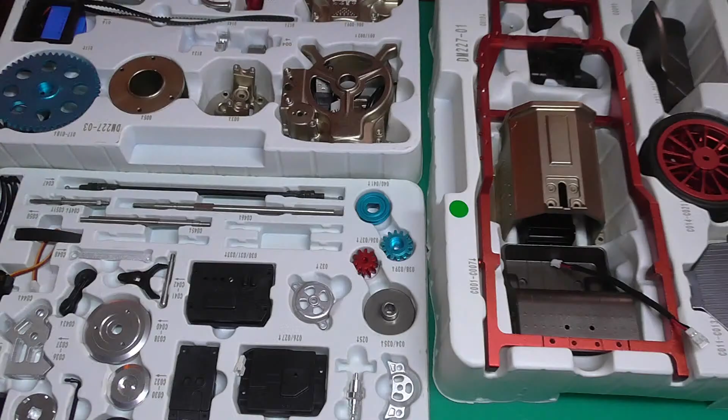Tonight I'm going to be building this bad boy. Hopefully this works, as you can see there's loads of it. It's sort of like a Ford Model T car, but this car is all metal with a working engine, so much so that I've already taken out the first bit because I can't do a live stream and come back straight into it without anything prepared. That's asking for trouble. But then again, it is Car Crash Tuesday, a Car Crash Tuesday stream. The first thing we're doing, it's obviously a single piston engine, so we're going to be making the piston.

Sticking it in the oil. I don't think I'm going to need any of this stuff because this is all about building the main body of the car and stuff like that, so I'll probably keep that on the floor for now.

Now this is from the same company, Stirlingkit, the same company that bought us the robot up there, the nodding donkey, the radial engine, which is somewhere. Where's my radial engine? Oh, that's behind the motorbike there. And we're going to be doing this car now.

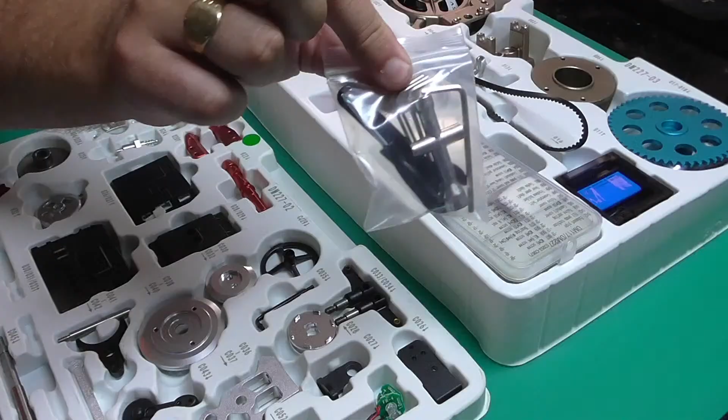What I'm going to do, which is going to be slightly different tonight, is I'm actually going to use all the tools that come with it. As you can see, they are in this bag here - we've got the Allen keys, sockets, everything. I'm not going to use my stuff tonight. Everything you see is metal.

Where we have all the springs and stuff normally, this time we've got two lots of this. But the good thing is it all goes up in a number - these go from 42 to 67, from 68 to 111, so everything in those we'll be able to find there. Everything else has got a number on here. I did think I had some missing parts here, here and here, but there's no numbers corresponding to these bits, so I think that's just the way that's been vacuum sealed.

But some of these parts, they are lodged in really well. Even the steering wheel is all metal - pretty fun thing this is going to be. But I don't know when I'm going to need this, so I will put that to one side without breaking it.

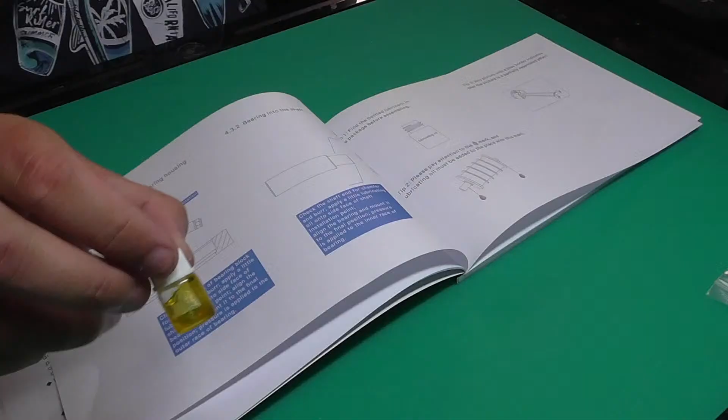And bring over the instructions, which hopefully you can see - the white balance has got a bit weird. But there you go, this is just telling us about how to put in bearings, how to put on clips. You still need this little pot of oil and lubricating oil. I don't know if I'm going to use this or use my own oil for this, but we are going to need that, where to lubricate things, that sort of thing.

And the first thing we're going to be doing is we're going to be creating this piston, as I said. Now we have got to use these blinking clip things, and I'm not very good with them, I have to say. So stand by, let me get these things out.

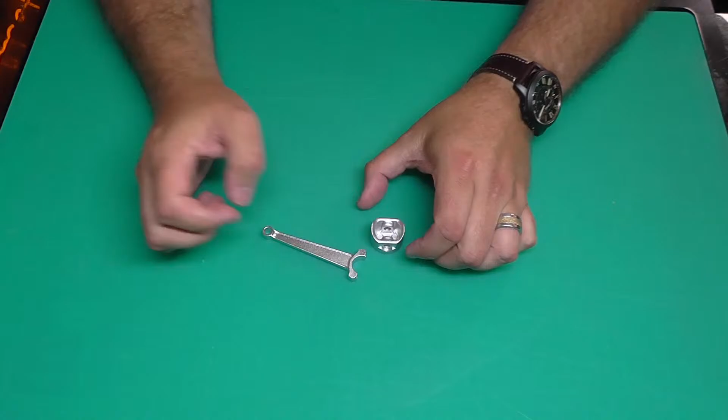So we need the piston arm first, and we also need the top of the piston. We need a little shaft, and then these are the things that I'm on about, which I absolutely hate, because I've got to try and get these in. And I know there's no easy way to do this.

So first thing we're going to do, take the small end, and I'm going to be putting that in here. As a matter of fact, I'm not going to do that - I'm going to zoom up that camera just a bit so you can see what I'm doing. And then we're going to be putting this shaft down through everything.

Now I've got to put these little clip things in, and I really wish there was an easy way to do this. But there's not. I guess getting one in is going to be okay, but getting the other, yeah - let's try it with pliers.

Now if I can hold it like that, I should be able to push that on. Should be able to - nope. I knew this was going to be a nightmare. Why do I do this on a car crash stream?

I'll get one on and then I'll look at chat, I promise. There has got to be an easy... oh, hang on, got to be an easy way. So theoretically, if I hold that like that... there you go, that's one on.

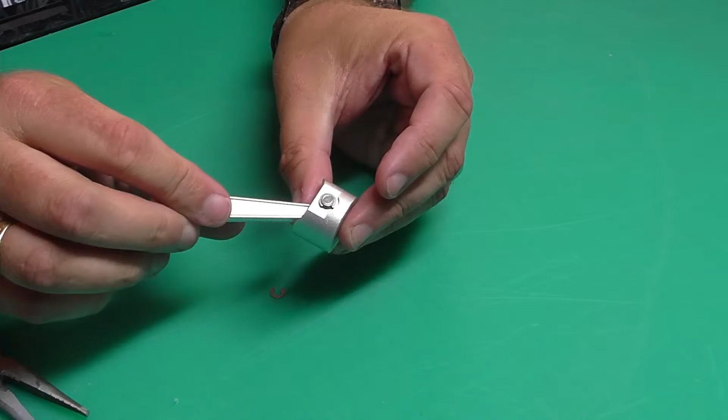Very good, C-clips, I don't know what they're called. What's Lou say? The rounded dome under the sheet looks like it could be Wayne. They're building an artwork of me.

They should, I'd build it. I don't know if Mrs. Welder Wayne would build it. One of me's enough, I think.

There we go, look, that one went in a lot easier. So we now have got a piston which works.

Next thing we're going to do is we need some more parts, which again I haven't got out. What an idiot. Okay, hang on a second, I need part 10.

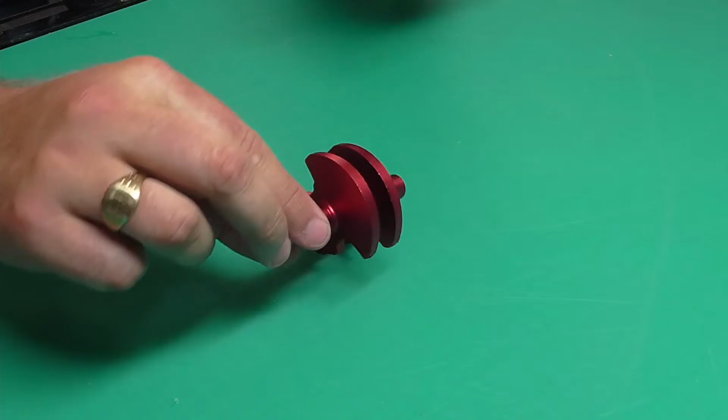Which is this lovely thing here. Look at that, all metal. I love that colour, I like the metallic colours. I used to have a car which was this sort of metallic shine, but in blue. I do like that, I love that colour.

So that we need a clip which looks like that, it's a little clip, and that's it. We just need 2 screws, which the good thing is I've already got them out. What I haven't got out is the Allen key, which is going to drive these in.

So this comes with Allen keys. We've got 1, 2, 3, 4 Allen keys, a socket, a tiny screwdriver, and a spanner.

I'm guessing it's the biggest one first. It is. I'm the model husband. Oh my god, Lou, you are so quick.

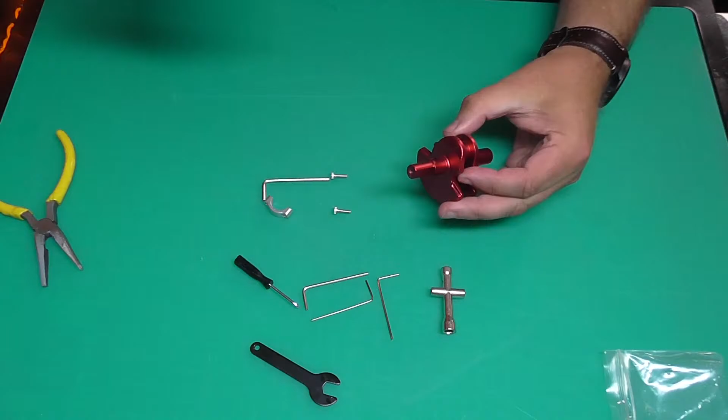Okay, where's this going? You've thrown me again. Okay, so this side is going to be going onto that center shaft, but we need to attach it to the other side here to lock that into position like that, if you can see that there.

So I'm going to be putting this in with the Allen key and this. Now remember, these are never magnetized. So theoretically, if I can get one in just a little bit of the way, like that, I should be able to get the other one in exactly the same way. Wow, that works better than I thought it would.

I think the last time I built something on stream was probably that 24-hour live stream, wasn't it?

Why are they called E-type clips, Wayne? They did look a little bit like an E, if that makes any sense.

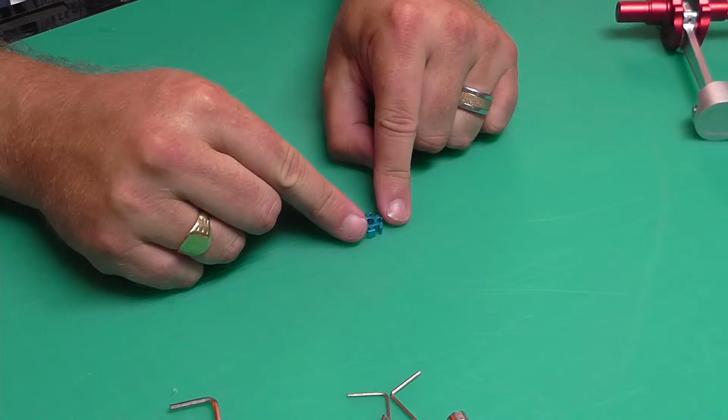Okay, so we have now got a piston on a cam here, looking just like that. We are now making an oil turbine, and I've already got the pieces out for that, which is this tiny blue piece here. So tiny, I'm going to zoom up even a little bit more.

Again, this is the colour of my old car. Look at that, I love it. As a matter of fact, that's not a million miles away from my Peugeot 205 I had as well.

And then we've got this little shaft here, and that is just going to go in like this. It has got a little flat side, so that can only go in one way. So that is the oil pump turbine.

And I'm going to be putting this in the oil pump box. Now that is big, that is... I think it's this, just checking the instructions. Is it this? I'm hoping it's this.

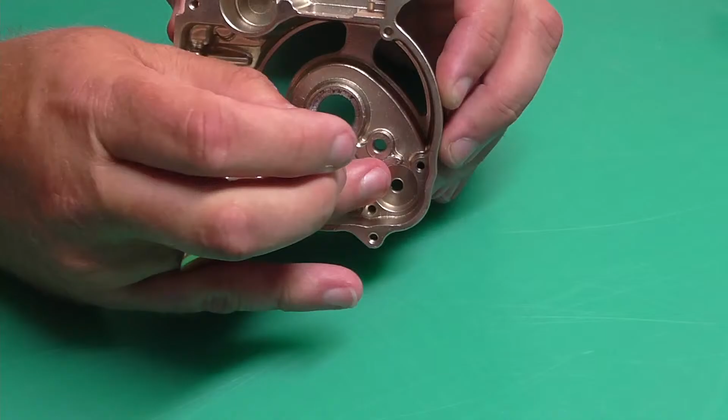That's this ginormous bit of metal here, and I need to get this round the way that they've got it there. And this turbine is going to be going into the hole that we can see just there, so that's in like that.

Now comes the difficult part of turning the page to see what I got to do next. Stand by, okay, I need some parts.

I'm going to install the oil pump end cover to this, so I need 65 and 52. This is where the game starts. I've got a 65 and 52. This is why I've got my little grabbing device here.

65 is going to be down here, and it looks like some little tiny screws. Oh my god, look, that just exploded like an alien intestine. Wow, stay. What the hell is that?

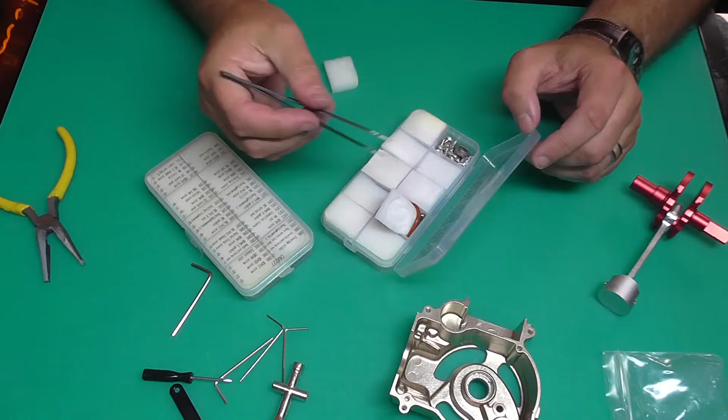Can you see that? Oh my god, look. What is this? Oh wow, there's two. That was like opening an advent calendar early. We can't be doing that.

Stay. Okay, so I'm guessing it's these two screws here, 1 and 2. And then we also need the plate, which is 52, which is in the one next to all the snakes. And the plate looks like that, I'm guessing. Yep, that looks happy. We're happy.

Oh, that thing's just going to be bane of my life now. Look, I can't get rid of it.

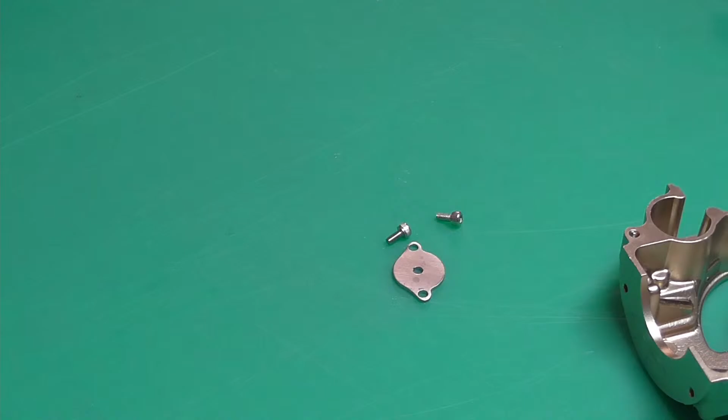So we want to hold this turbine in place, which means we're going to be putting this over the top, just like that. And again, securing it down with these screws.

There you go. Hello, Ian. How's it going? I'm just looking at chat. It's a hernia. What's a hernia? You have the most random chats in chat there. I've got the chat for YouTube right next to me, so I can see that. I can't see chat from Twitch and stuff at the moment, but there you go.

Anyone else seen the Enterprise D Advent Calendar? I did. Nexus posted it today. I don't know if that's something I might be buying. Hello, Todd. How's it going?

So there we go. That's the turbine and it's kept in by that little plate there. We're going to be putting a gear shaft in there into the shaft hole.

So many innuendos on tonight's stream.

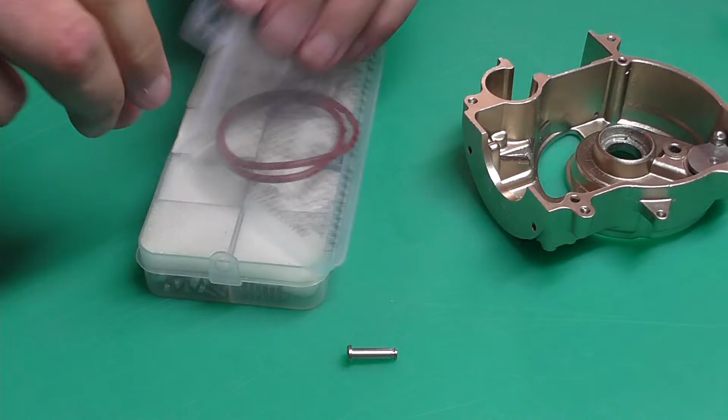Okay, the gear shaft is number 50, which is here. It's in with the all of this stuff. I'm guessing that is a gear shaft. You know what? I'm just going to keep those elastic bands out. They're not even elastic, I don't even know what these are. Okay, I'll keep them out. That is going into the gear shaft hole, which is right next to it, just there. Simples, that was an easy stage.

We've got to install gears and oil pump gears. That's the next. Oh God, what did I do? Okay, we're good. That doesn't really make sense to me. I'm just having a look.

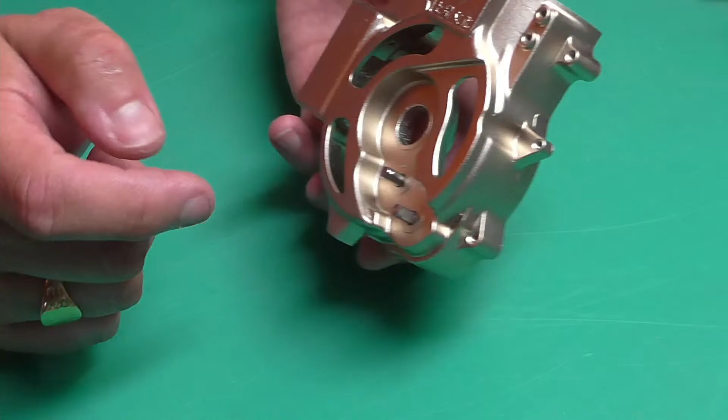Okay, so we're going to be putting some cogs on the end of these, and by the look of it, we're putting those damn split pins on again. So I need 37 and 38. That's going to be in the box. Ugh, let's have a look.

Bringing it up. 37 and 38. Well, there's 38. And there's 37. So one. Ah, wait a minute, there's two different sizes. I'm guessing it's that blue one there, not the big one. Okay, I hope that's right. I can't be sure. I'm going with it though.

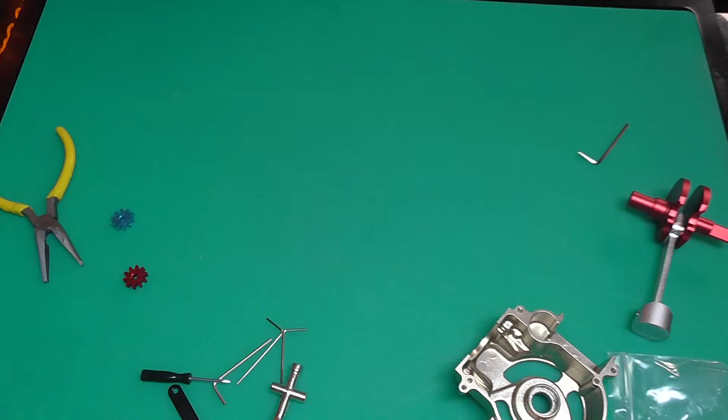And I also need some more of these clip pins, which are number 59, which again are in here, which are impossible to pick up. 1 and 2. And in answer to David's question, I can't get it out.

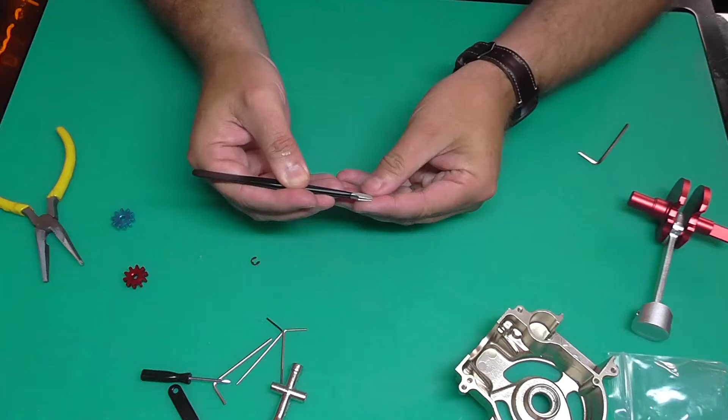Move that over there. Look, they do look like a C, but because they've got a notch in the middle of them, it could be an E. You see? I don't know. I don't know why they call it what it does.

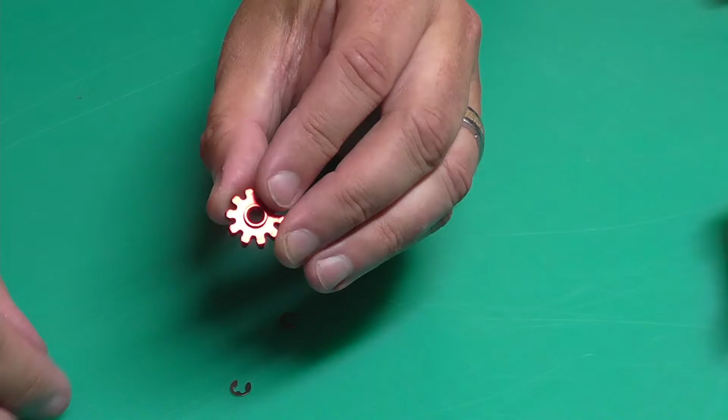Okay, so which one goes where? I've got an... I mean, these look exactly the same, but just slightly different colour. This one's got a sort of like circle which has got a flat side, and this one's just a complete circle. So I guess that's going to dictate which ones they go on. So the one with the flat side is going on this one here, which is the oil turbine. So that goes in like that. And the other one has got a lip on it, and I'm guessing the lip is facing down. That's going to go on there like that.

Got to put these split pins in. Not looking forward to this. You see how I pick them up then? I just press them really hard till they stick to my hands. There you go, that's gone in a little bit better. And then get me pliers. Theoretically, there you go, clip it in.

Okay, oh god damn it. Lining them up's the easy bit, getting them in. There you go, that's two. And now they're not falling out and they are free to turn. They turn better that way, I find, than the other way. But we have got them in place. It does want me to lube them up. So I am going to use my oil that I've got here, because I can really swamp it on there.

They are happy for me to use as much oil as I want, and as you can see, that's already made a difference there. So we're all lubed up and covered in oil.

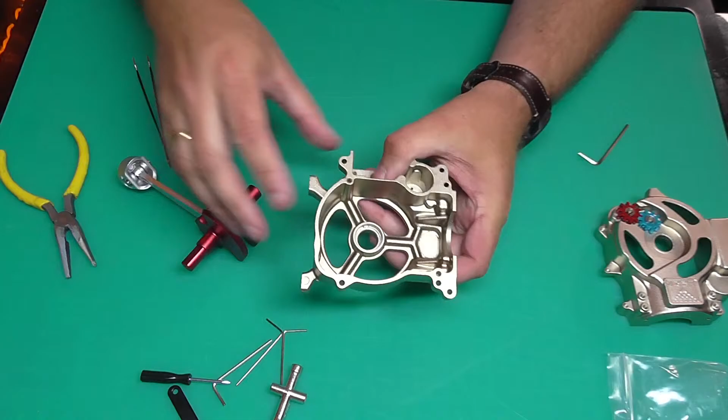Next I'm going to take the piston we've just been working on. I'm trying to figure out which way round this goes. Oh, no, it doesn't go in this one. Let me go get the next part out. Stand by, which is the other side of this. This is 001. I'm going to piece all of this together.

So they've got it this way round. I need another part, number 70, which is a water battery iron sheet, I think that's what it's called. No idea, I'm looking. That's not that. That's not that. I'm confused, stand by. Just looking at what I've got here. A water battery iron sheet, 070.

One, two, three, four, one, two, three. I haven't got that in here. I don't think it's this. No, it's not that. Just looking around now to see if I can find what it could be. This doesn't make any sense at all. 070, that's definitely 70. It's got to fit over the end of this here. So I'm looking for some sort of washer which has got a massive hole in it. Just going to have a look through everything.

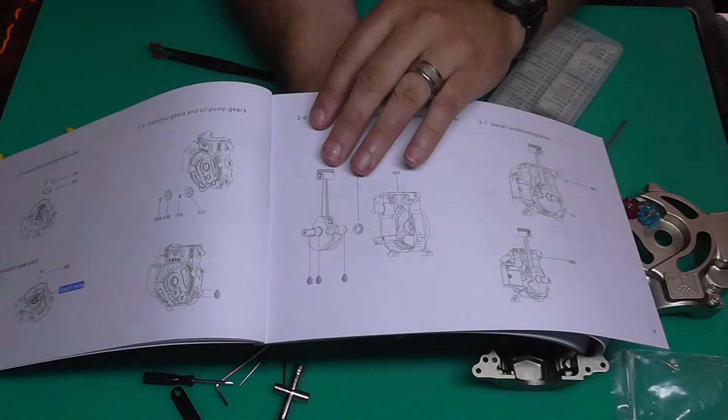One second. I don't think it's in there. Let me just show you what we're doing. We're looking for this little piece here, and it's definitely not in where it's meant to be. I'm looking again. It's going to be fitting on the fatter side as well, because that is going into here, like that.

And the only thing that's even resembles, even looks like that - I don't think that, is it that? I don't think so, it's not hollow, is it? No, it's not that, doesn't even look like the part. Okay, stand by, let's just have a look in this one. Nothing, nothing. Oh.

Oh, that could be it. Let me have a look at that. That could be it. Does it fit over this section here? It does, I'm thinking it might be that. Which in that case, that one was in stage - I don't know, it was in this box here. I think that's what it is. Let me look at the instructions.

No, it can't be that, because the end that we're putting through is this end here. That's the end that they want me to put whatever this is on top of. Stand by, still looking, let's drop that in again. It's not that, not that. Nothing in there, nothing in there, nothing in there, nothing in there.

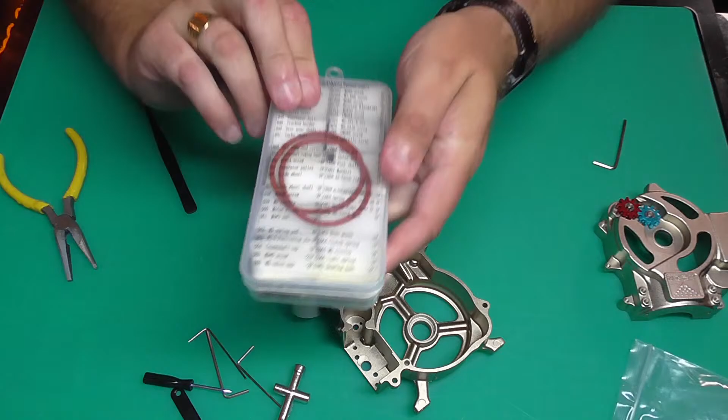Stand by, okay so we've got two 70s, that's the problem. So this one is basically - let me try and find it - has got just 070, that's the one that I want there. Let me show you on that, 070. On this one we've also got an 070, but it's got a C in front of it. So that's the difference, a little bit confusing.

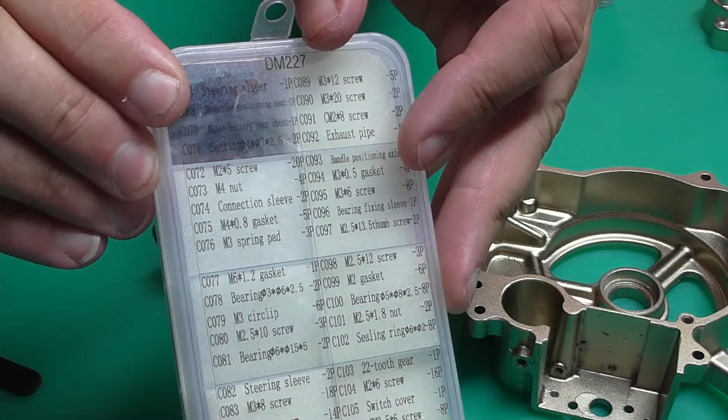So we got there in the end, it's a bearing, so we've got the bearing. That's going to go in like this, into this shaft, all the way in. So we've got our single piston engine being built now.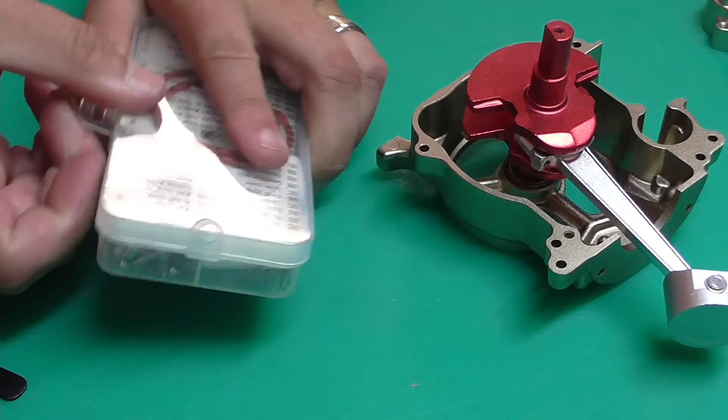We want to lubricate those parts up, I'll do that in a minute. But I do need some shafts, which are 63 - I say shafts, I think they're screws. Yeah, we got there in the end. So this is 63 we want, which is called a 2.5 inch positioning pin.

2.5 inch positioning pin, what do they look like? Ah, wait a minute, got it here. One. And should be another one. Stand by, is there two or just one? No, there's two. I'm looking for you, I'm finding you. Ah, hang on, I got it. There it is, there's the second one.

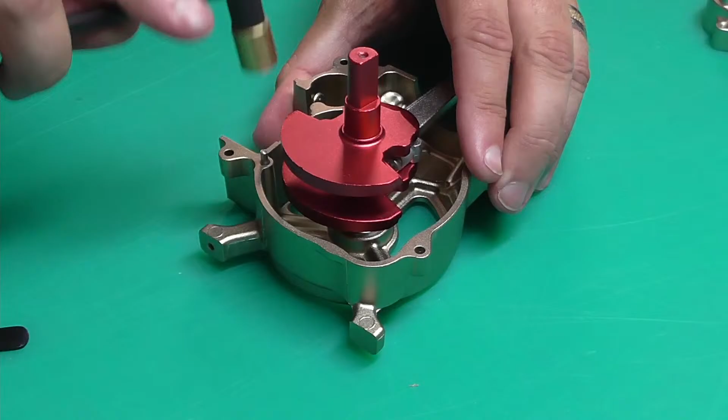Okay, the positioning pins are going in these holes here. So one here, like that. And the other one is going on the inside section - whoops, which I'm dropping, just here. I'm sure it can go down a little bit more, needs a bit of concussive force. That one's gone all the way down, that one hasn't. If I have to get nasty on that one, I will.

So that's those two in. Stand by, just checking. Okay, we need another 070, another - I'm trying to find it now - another bearing, which is going on the other side here, like that.

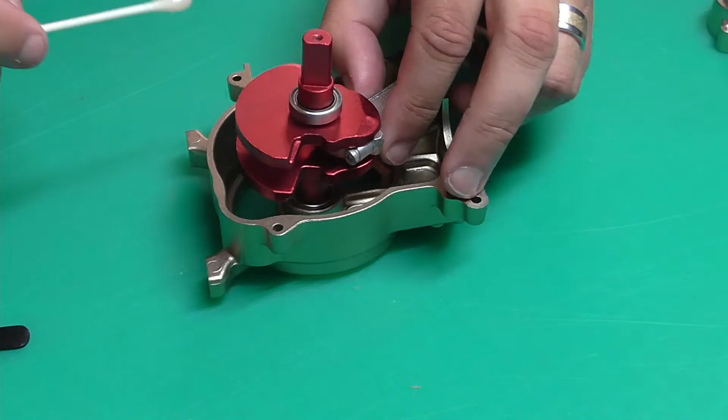I am just going to lube this up, and lube this one up as well. That'll drip in there - oh God, getting in a mess now. And we're going to piece these together. So theoretically, guessing it goes around that way.

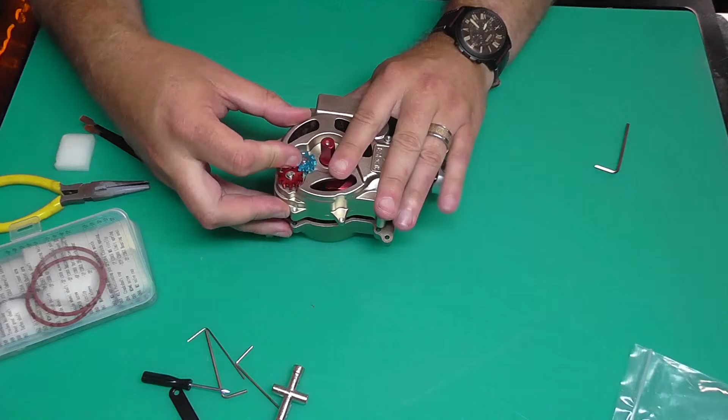That is going to go in just like that. Perfect. Looking good, isn't it?

Okay, we're going to be putting some screws in. They're going to go in this side here, and we need 4 of them. They're 54s. They're going to be in here. We need 4 of them. Move these stupid things out of the way.

Number 54. 1, 2, 3, and 4. Of course, it's come apart again. I mean, why wouldn't it want to stay in place?

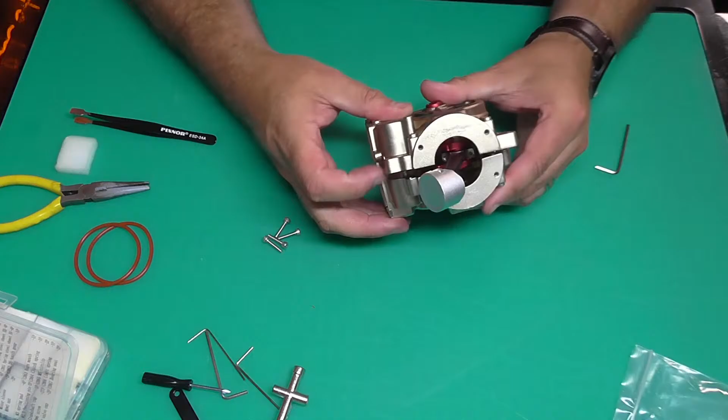There you go. We're back, aren't we? Right, okay. Where do they go? Not really helping. I think they go in this one here. Let's get the first one in. Yep, it's going in. Cool.

Oh, you're talking about the password? Then you guys are already onto it. You know exactly what I'm talking about. I've got no idea what the password is. I don't know, before anyone asks.

Here's the second one. Lou, I know you said you had to go. If you're still here, you might have to go now.

No, it's not an O-ring. Wayne lost his bearings, yeah. Typical. Hello, Roy, how's it going? That's 2. 1 over this side.

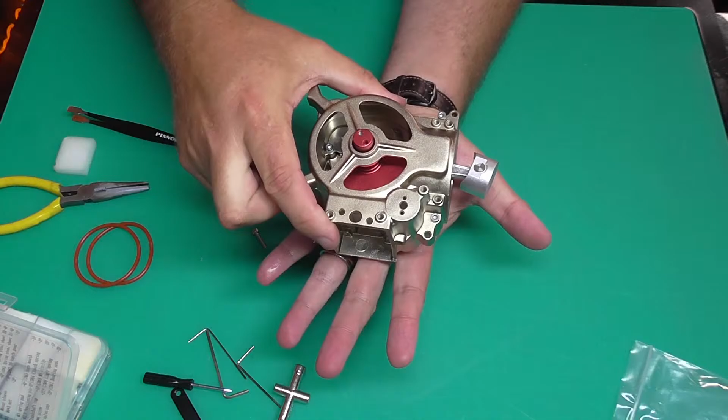If you can imagine, this is quite big. This is the size of my hand, as you can see. It gives you an idea of how big this car's going to be, because this engine's going in the car. And as you can see, the engine works.

People might think I'm referring to your shaving technique if I call you Brazilian Jim. Okay, so there we go. That's the cam going round. So obviously when that goes out around like this, as you can see, it's turning the cam on the inside, which is going to make this pump up and down. Very good, I like it. I like it a lot.

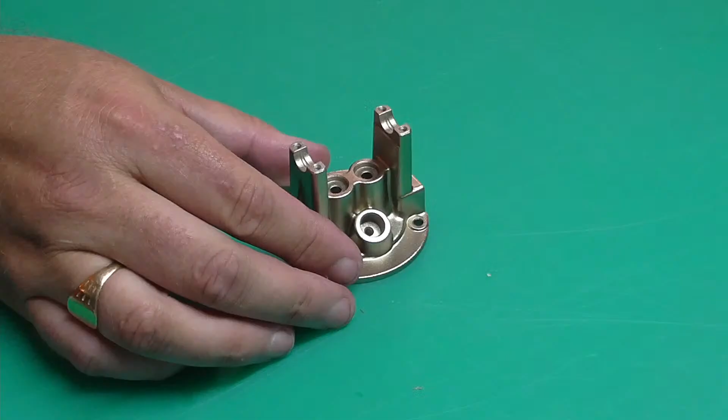So we've done that. We can keep that to one side, and we're now going to create the cylinder head. And for that, I need part 003, which looks like... I've got it here, which looks like this. Again, I love this metal colour on here. So we need that, and we need 47 and 19.

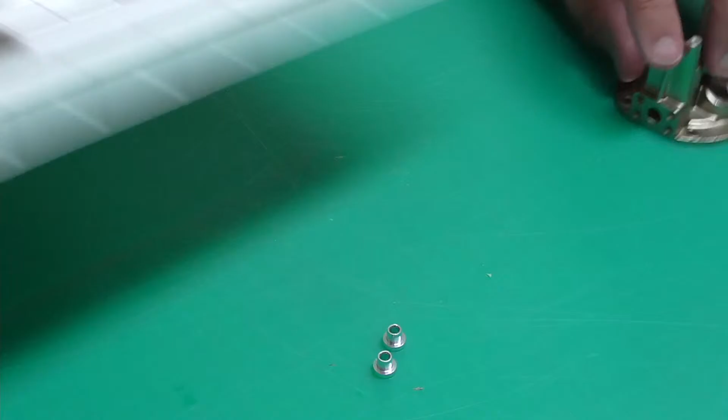47 and 19. Nothing in there then. It's all in here at the moment. So 47 is the valve covers, 1 and 2. And 19 is going to be in that little box of tricks that I've got here. Looking like that. Anyone help out? Can you see a 19 anywhere? There they are, look at the top. Big metal screws, 1 and 2.

Get that over there. How do these go? So they're going to go underneath here. I've got it the right way. Yep, and then we've got these valve covers going on top that way round. There's 1 - oh god, hang on, they're going to want to fall out - and 2. They're looking just like that. Hopefully you can see that.

And then we've got to put some springs and caps on the top, which is 44 and 66. God, okay. Springs - right, the springs. Here's the caps, 1 and 2. Got to find these springs. They're number 44, they're in here. Okay, 2 of those.

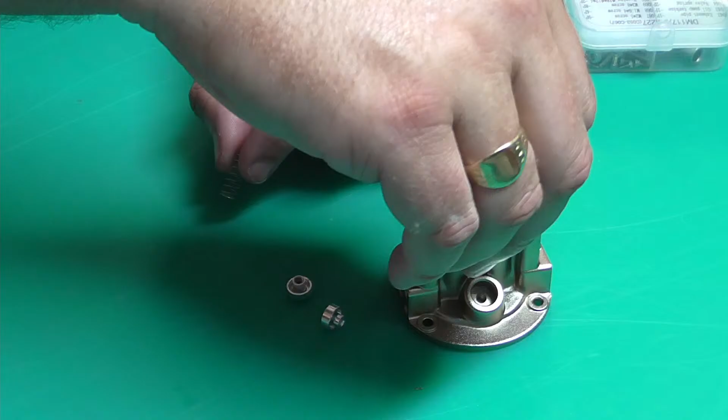Always nervous with springs, I have to say. So they're going to go on the top here and here. This is asking for trouble, this is. Okay, I'm going to need to keep it compressed while I try and screw the top on here. God, okay. I've got one on, that's looking good. Make that nice and tight.

L-shaped Allen keys are a pain. You know, I've got straight ones here, Tom. It's just that I'm not using them. I want to use all the tools that come with this kit.

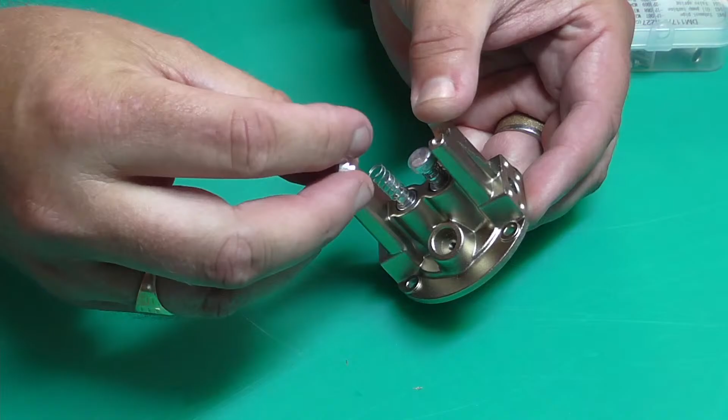So is it overhead cam? I don't know, it's so old. My first car was an overhead cam. But there we go, that's them in place. So when they move, obviously, they're going to go like that when it's going around. Very good, I love how this works. Okay, so they're in place.

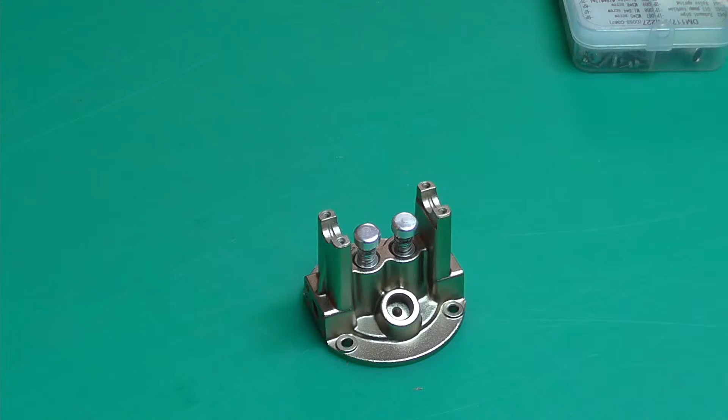Let's see what else we've got to do. Oh, you remember you said about the spark plug? Who said about the spark plug? We've got a spark plug, Howard. I've got to find it, number 24. It's here.

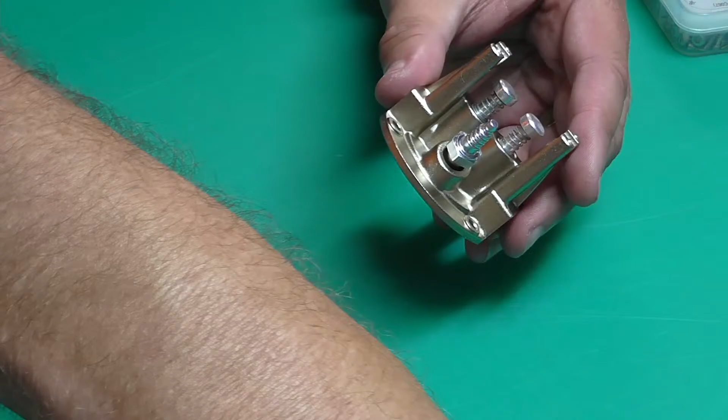I've got it here, there's a spark plug. It's not a real one, just a resemblance of one. That's going to go into the hole just at the front there, a bit like the radial engines - they had the sparks in there but they weren't used. That's probably why they gave me a spanner, but I don't think it's for this, because there's no way that's fitting around there. So it's just going to be hand tight. But there's your spark plug in there, like that.

What's next? We're going to assemble a synchronous wheel. For that I need parts from here, which are 34, 35, and 22. They look like cogs. 35 is there. 34 is this underneath, there we go - look, quite big things these are. And 22 is going to be some sort of shaft. There we go, 22.

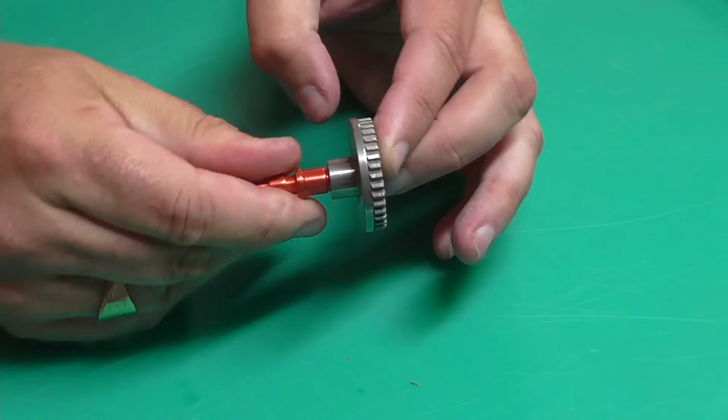No idea what that is, let's have a look. 62 is a spring pad, which I'm guessing is - oh god, what is 62? Not that. Well, 65 is a screw, so it's one of them screws. A spring pad - the only thing I've got in here that's resembling what they're saying is this thing here. I can get it out, stand by. Oh come on. Which is one of these, I don't know what we call them, spring washers? Is that what it is? Spring washer, I guess. Let me put this one back in.

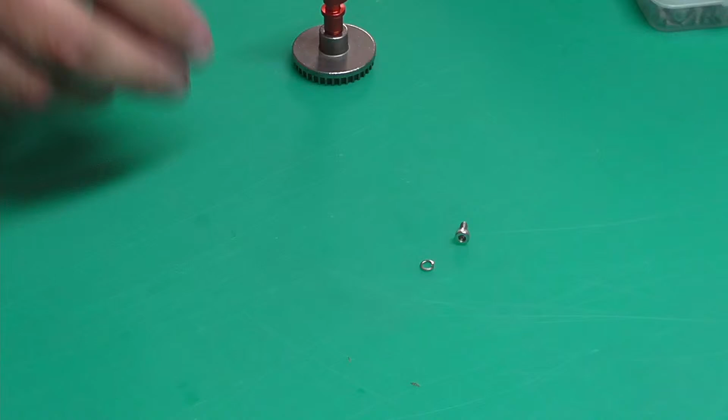Okay, so we're going to have this spring washer going on the screw, and that's going in the end, which will hopefully keep everything in place. That's not going to keep everything in place. No, it's because I've got another part to put on, number 33. I just saw that, one second. 33, kind of looks like that, but it's not.

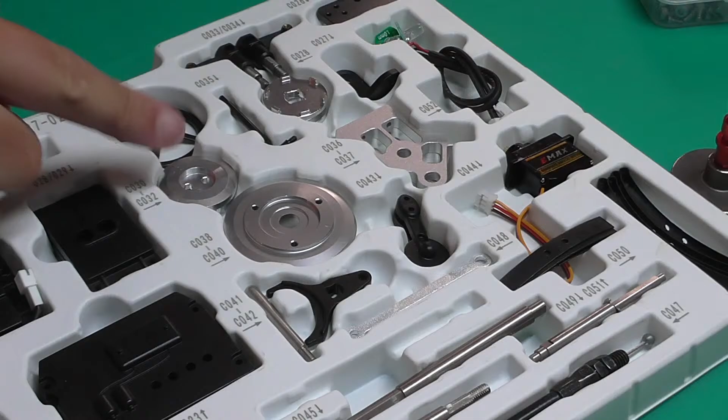33, 28, 35, 36. Any idea where 33 is? 32's there, 34's there, 30 to 32's there. Oh come on, 33. What the? Okay, stand by, just looking at my other box of tricks. Can't find 33. Right, 33 is sort of like a flat thing there, looks like that, can you see that? That's what I'm looking for. It's too big to be in one of these pots, so I know it's not going to be in these screw boxes, it's going to be here somewhere. Oh, 33, there we go, it's underneath this, there it is.

I do need, just so you know, I do need some glasses. If anyone's noticed, can you see how my glasses are actually tilted at this side? Phil fixed them when I was in California - they broke, I haven't just had a chance to get them fixed. But you know what, Phil's fix he did on these was working perfect up to a point, now it's all over the place. So, oh Lou, you are still here.

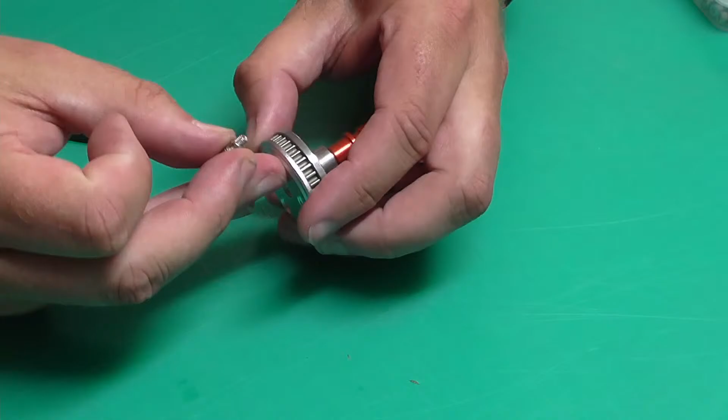Top of the tray, I got it, so we're good, we can continue, it's not game over yet. Okay, I'm just trying to see which way this goes in - they want the rim to be facing outwards, like that. So, spring washer onto the screw, and put all of this together just like that. Excellent, and tighten it up. What is this? This is a synchronous wheel, that's what they're calling this. I don't know what that means, to be honest with you, but whatever it is, it's doing what it's doing. That's it there, so all good.

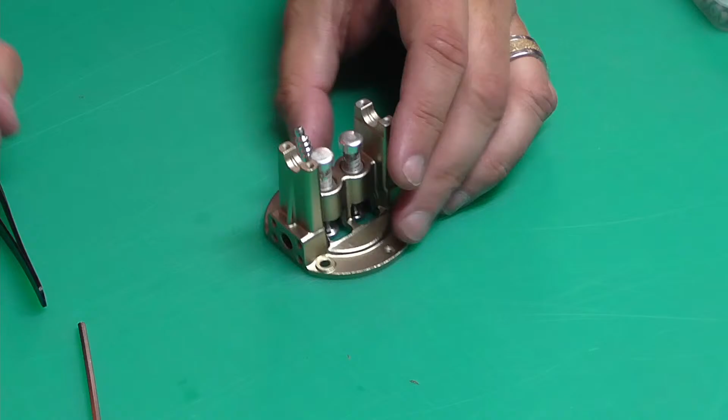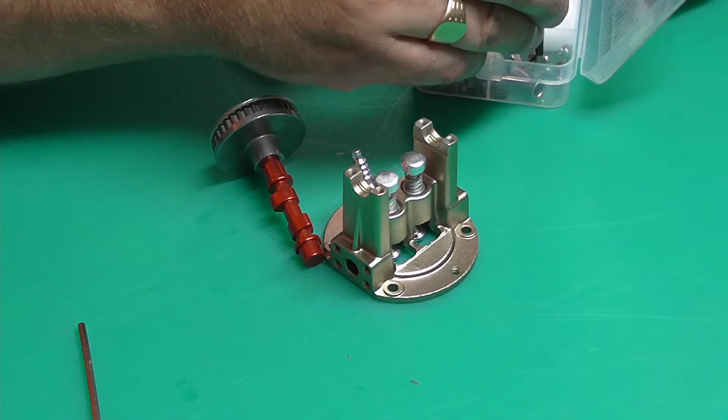We're going to be putting this onto the cams that we worked on before, it's going to go on this way. Before I do that, once again they want me to drop some oil into these points here, and I want some brackets to put over the top of it, which are number 45s, which are in here - camshaft covers. So one, and get this last one out, two. We do need some screws for that as well, which are 67s, which are in this one here, and I'm guessing 1, 2, 3, 4.

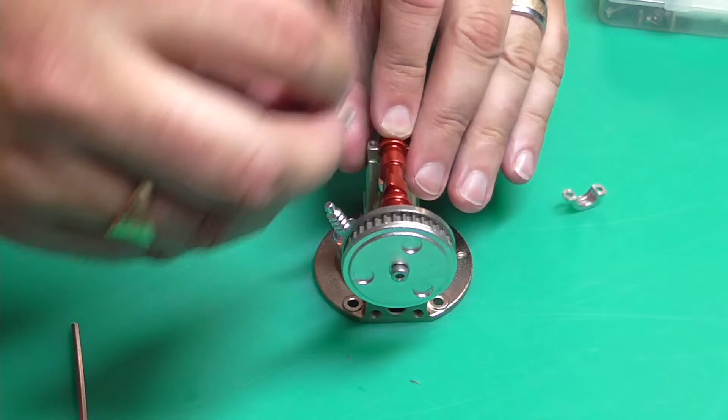So this is going to go on like that, so that the cams can, when they turn, as you can see, they can operate those. Brackets on top - I'll put this end one in first, and then this, oh damn it, and then the screw.

Okay, this is going to go down the end here. You know what? I think I've got the wrong screws out. Yeah, it's small, it's not these screws. These are smaller screws. What number did they say they were?

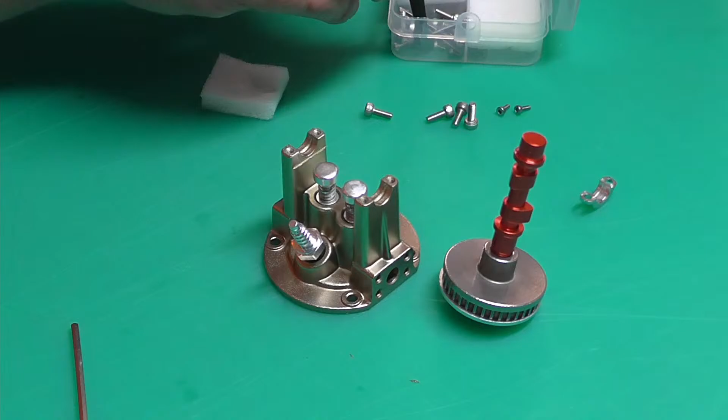67, so I'm looking here for small ones. These ones, 1, 2. Oh God, there's so many small screws. 3, I'm guessing, 4, no that's too small. I'm guessing it's this size. Let me try that again.

That's on there like that. The little bracket on top, and then one of these tiny screws on there, which means a smaller Allen key. Not that one, let's try that one. I think that one's too small. Let's go that one.

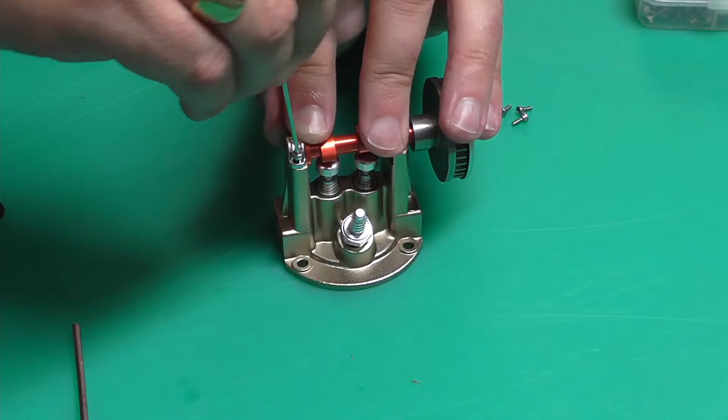Again, remember, I'm just using all of the tools that they provide. I'm not using my own stuff. Chances are I don't have my own stuff.

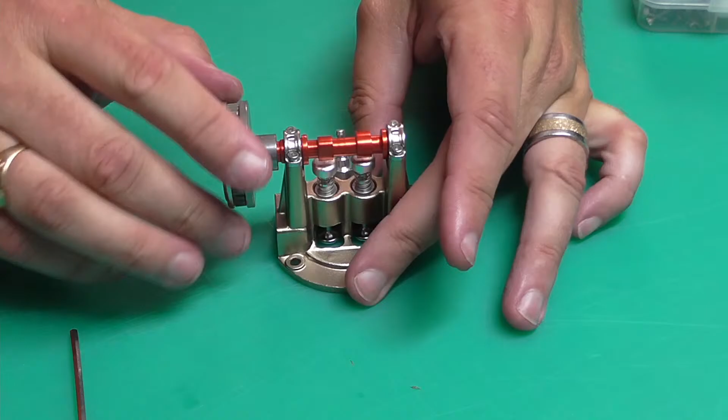This is the last one going in here. Yeah, I turned it off, David, so that's gone now. And there we go, and as you can see, it's making those little things go down and up, down and up. That's pretty clever, I like that. Okay, that's all lubed up.

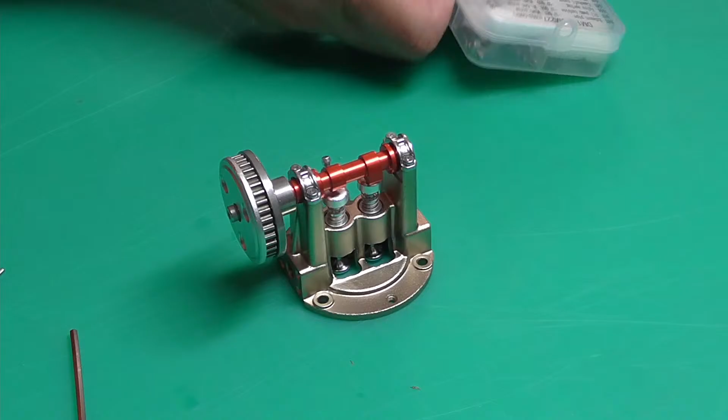I've seen that, which was... where did I see that? I saw a pipe somewhere. Stand by.

14 to 21, bring this up. We've got lots of wheels in here. They look like this, 1, 2. I think it's underneath all these wheels, those pipes. 3 and 4, just looking around. No, perhaps not, it's 14 to 21's in there. What do I need? 15.

No, nothing there. Ah, got it, I've got it. I knew I saw it somewhere. There we go, pipe, looking like that.

42, which I'm guessing is in here, which is an exhaust pipe, which looks like that. Lovely jubbly. And finally, lots of 65 screws, they're the screws that we've been using throughout. Quite a few of these. 2, 3, 4, 5, 6, 7, 8. Right, let's get all these together.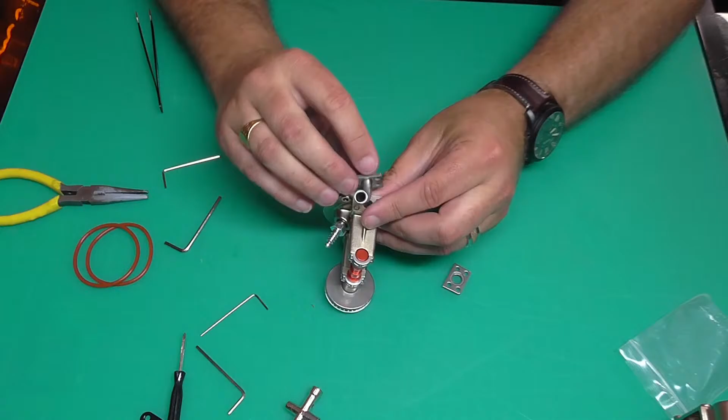So then this can go on the end. I'm guessing that don't make sense. Like that, yep it does. Able to rotate, a bit weird. And we're putting the screws in this side here, so it's the bigger Allen key this time.

That's the first exhaust that we've got going in. Never make mistakes, Cam channel. I'm always making mistakes. I'm surprised my models get finished, you know.

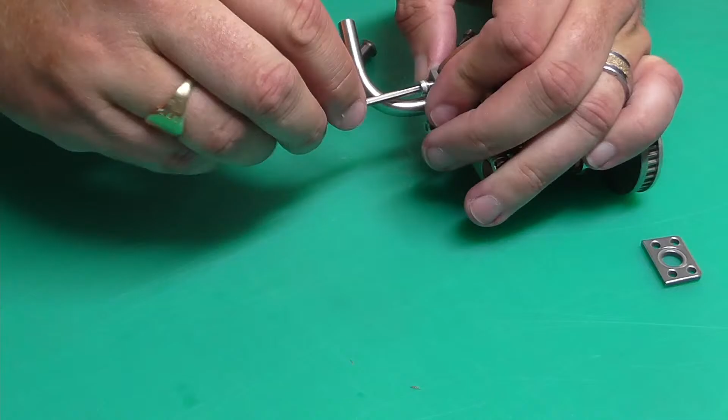You can actually see what I'm doing, and what I'm doing at the moment is I'm trying to screw something in and there's no hole. There we go, hopefully, there we go. Can't get it in the hole, but I can now. And when I put this in, oh it does sort of lodge it in. I'm guessing that's got to be facing straight down. So I need to, I can tighten this, keep it there, and then as soon as I tighten that up, that's not going to move. So that's one side, hopefully I'll put that in the right side. I have, good.

I'm shocked I managed to do this for 15 hours with the Volvo. And remember, this isn't just an engine, this is a car as well. So once we've built the engine, we're going to be installing this into the car.

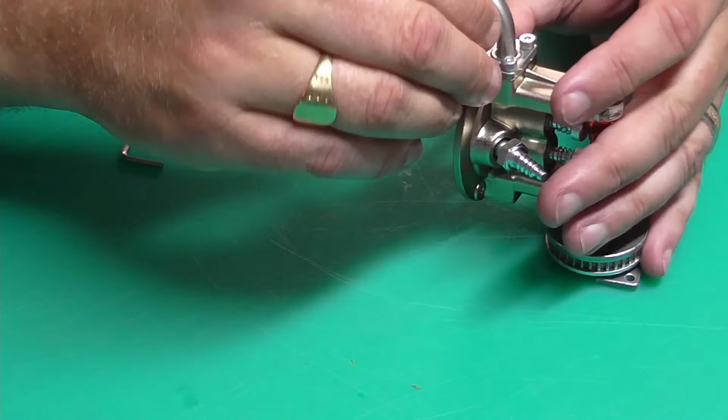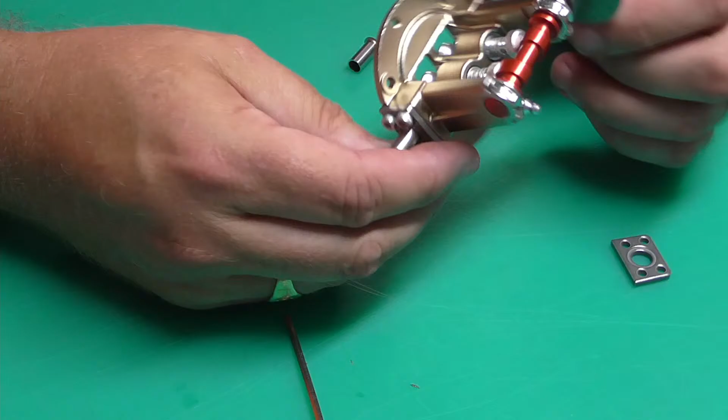Hello. The cam belt, what? I don't know, they're working, I'm looking, okay thank you. I might have, I'm just looking at my pictures, stand by. No, I don't. No, DRN, it looks like the picture. I'm going by this hole here, so this is on this side of that hole there, so I'm guessing that's right. I'm hoping it's right, you've made me second guess myself.

We're looking good, we're looking good, it's the way round it needs to be. But you know what, that's what we do, we check things here. Oh, unless you meant this spacer here. Ah wait a minute, oh no, I have put it around the right way. No, we're good, we're good. Put that through, there's a little lip for this to go in here, you see, that's what keeps that in. Is that what you meant?

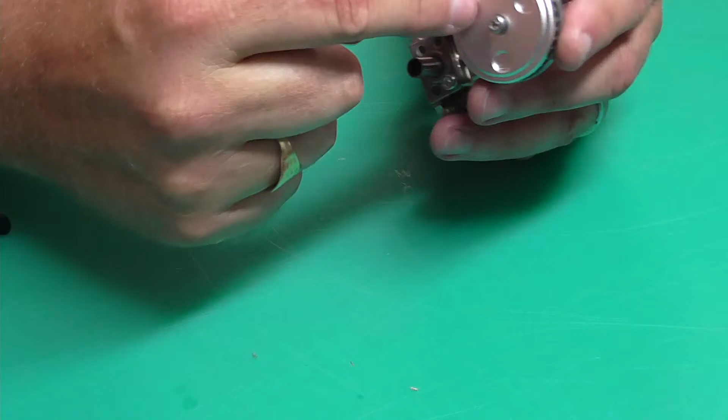Don't know, DRN, Wayne, it's to stop the cam belt from running off. Oh I see what you mean, right okay I will check that, I know what you mean now. Let me get this bit in and I'll have a quick check. Are you talking about this bit on this side? Switching that round, these two bits are on fine, I'm guessing you mean the end bit, yeah?

Take care, John. See you later, mate.

I'm waiting for your answer, DRN. I know you're 45 seconds in the past. Oops, dropping things. Hello Gary Whitfield, how's it going? Haven't heard from you for a little while.

Sorry, I've missed a lot of chat tonight. You know me, I'm just getting back into it.

Okay Wayne, yes right, okay cool, I will check that. The problem is there's no... I see what you mean now. The belt's going to go around here, but there is no lip. So if I turn that round, we'll have a look, we'll have a look.

Stand by, right so that's that side in as well. Let's just have a look at what DRN's talking about. I just take this off. This was what I put in with the split pin here, but there is a... If I put it around that way...

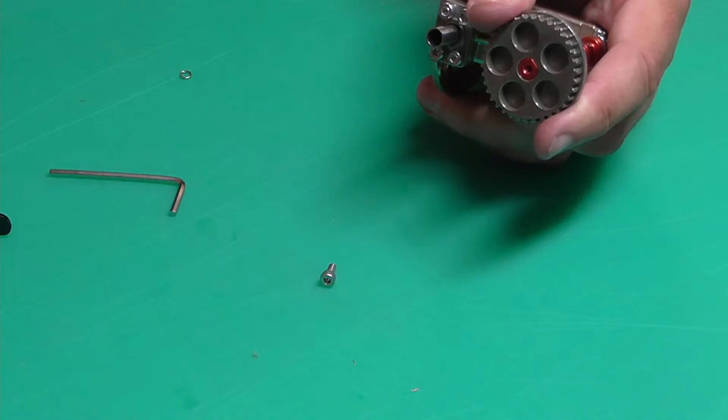I think you might be right, you know. I think you are right. Looking at the picture, and they don't have that, but they do have the lip in the picture. I think that is the right way round. I had it, DRN, just looking at it. It doesn't really make a difference either way.

Test fit the belt, okay, I can do that. Where's the belt? Oh, it's that big thing, isn't it? Hang on, stand by. Let's go and look at the belt.

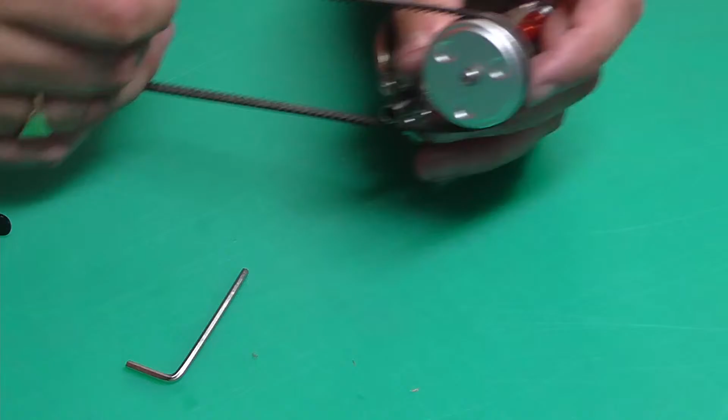So I'm guessing this is the cam belt, it has got teeth so it's going to go in there. You see, I don't think that's going to fall out of there, I think we're good to go on that. So there you go.

We're good, so that's looking pretty impressive at the moment. We've got the exhaust system in there, and that's the cylinder head completed. And I think we can just get time to do one more thing, and that's to house the piston here.

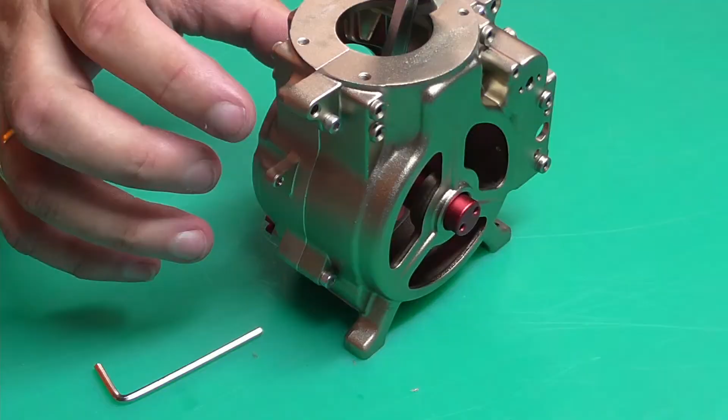So I just need part 5, which is this. Stand by. Ginormous part, look, check that out. And you know what I'm going to have to do? I'm going to have to lube this up good and proper. Just making sure I'm putting it around the right way. It's going around with these sections facing up, I believe. Just having a look at that.

The picture's different from what the... it can only go in this way, so it's going to go in kind of like this onto there. Which means I'm going to need to lube up the whole of this inside, which I'm going to do now. Lots of lube. Excellent. And then line this up.

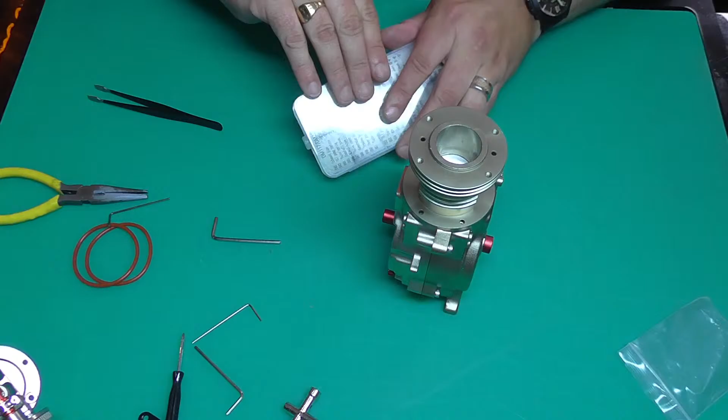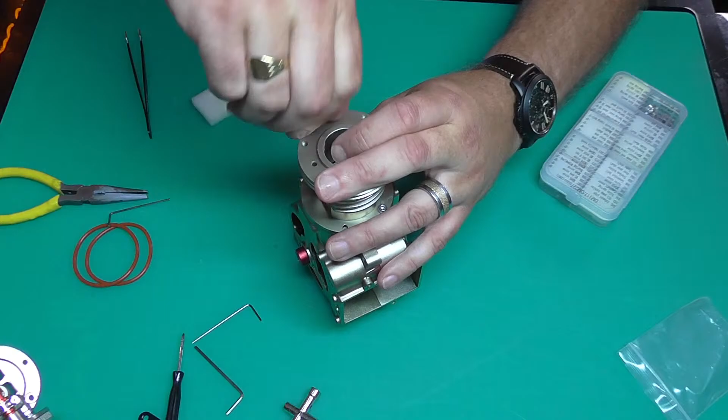Let me go back to that top camera. Yeah, these are all premium kits. That's why this one is quite an expensive kit. But as you can see, every single thing you're using is metal, hence why I'm lubing everything up. Use your finger - I tried that, but my finger's covered in oil, Jim, so I'm slipping all over the place.

Before we knock off, I've got a little quick story to tell you. I think I've told you one of these before, but I find it captivatingly interesting. Yeah, what we've got to do, Chris, is find out - because I've got my kids at the moment, you see - I've just got to find out when I'm allowed to have the kids next year. I've got to negotiate that with the ex, and then I'll be able to get back to you.

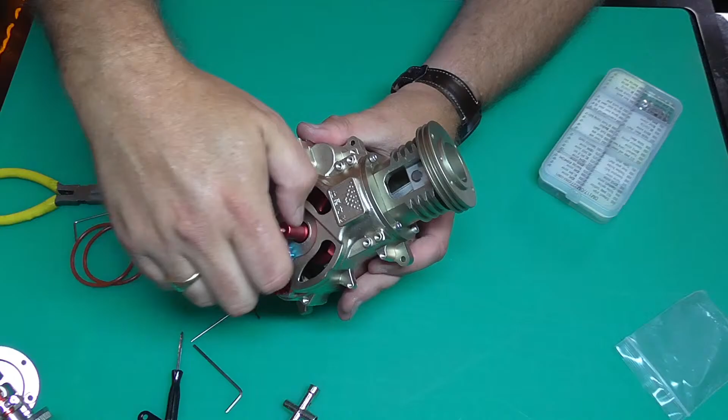So, all cool, there we go. That's in place. So when I turn that, as you can see - god, that's lovely and smooth. It's going up and down. That's brilliant, I love that. Look, I'm going to show you on this camera. Look, check that out. This is excellent. So listen, all the links to that are in the video description, so you'll be able to see that afterwards.

Something I've noticed - they're talking about the cost of living going up, and inflation is going to be 18% next year. Remember I had a white cutting mat, I've talked about cutting mats before. You can tell the state of the economy by cutting mats, because my white cutting mat, when I bought it, was £10.99 off Amazon. Do you realise it's £30 now? Actually it's £32.99 now. Something's going on with cutting mats. Shareholders and people in Wall Street deal in gold, but us model builders, we deal in cutting mats. And the price of cutting mats at the moment is completely crazy.

The engine lays flat under the car, does it? Wow, big engine. Can't wait to get it going though, but that oil certainly made a difference. Look, it's going to be interesting to see that move.